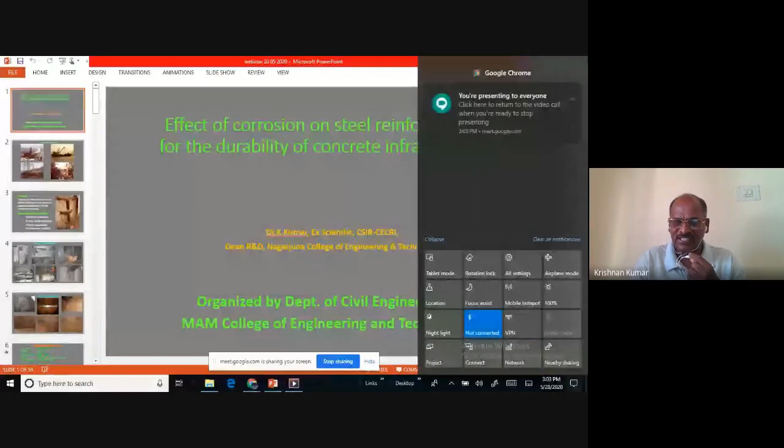Are you able to see my screen? I think you are not able to see my screen. I have to make present now. Yeah, your entire screen, and I have to make and share. Correct? Are you able to see my screen now? Yes, sir. Yes, sir. Yes, sir. Now my presentation is seen. Yes, sir. Slideshow. Oh, okay, sir. Now it's clear.

My dear participants, today we are going to discuss the effect of corrosion on steel reinforcement for the durability of concrete structures. So the subject is steel corrosion in concrete, not in the atmosphere.

I am going to discuss entirely about steel reinforcement corrosion in concrete, which is different from the atmospheric corrosion of steel. So what are the effects, and how to monitor and protect against it? All these things we'll try to cover. So within the available time, we can share our experiences.

So you are seeing now the corrosion problems categorized into 4 different areas. One is industrial corrosion - in the industrial field, corrosion is happening. Another is shipbuildings and fortresses and so on. Then transmission towers and power generation units, inclusive of nuclear power corporations. And finally, transport and infrastructure.

So corrosion is initiated when the atmosphere becomes aggressive. Automatically, in these 4 different areas, corrosion never stops - it will start. Your materials will start corroding. So corrosion is the loss of metal, and when you have loss of metal, automatically you have studied stresses and strain and so on.

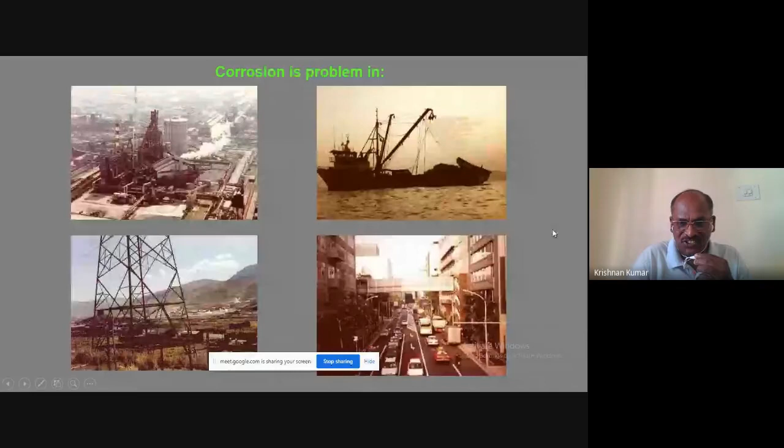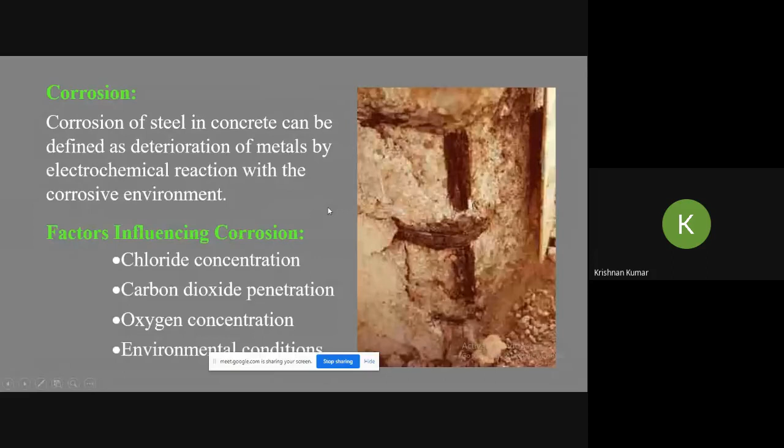...loss of material by way of electrochemical reaction. Corrosion is an electrochemical reaction. For electrochemical reactions to occur, there are different components needed. Any electrochemical cell has 4 components: one is anode, another is cathode, and the electrolyte and electrical continuity. If all 4 are satisfied, then electrochemical reaction happens. So mainly these are the 4 factors predominantly that initiate and drive corrosion.

When you are talking about that, there's chloride concentration, oxygen concentration, and other environmental conditions. Environmental condition means the temperature around the atmosphere, the humidity - everything comes under that.

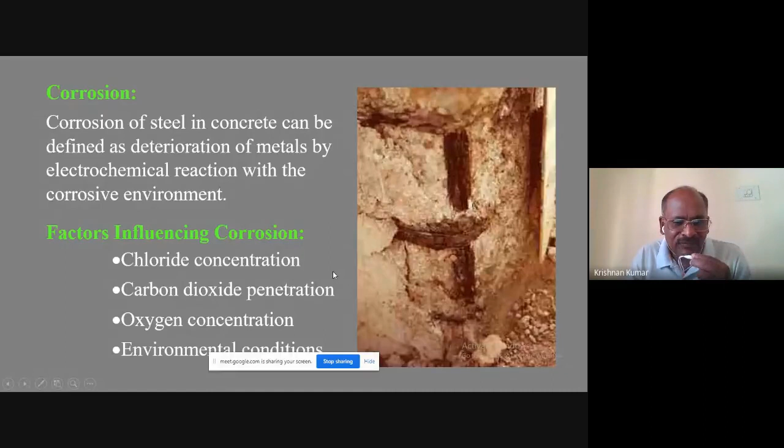So these are the phenomena that influence corrosion. When you have any industry or structure, first and foremost, you can have visual observation. Through visual observation, you can identify whether the structure is corroded or not.

Normally in beams, flexural members, or even compression members, the corrosion cracks occur parallel to the reinforcement. Other structural cracks may be perpendicular to the main reinforcement, but corrosion cracks occur parallel to the main reinforcements. So these are the different types of corrosion that happen.

This photograph we took from Trichy BHEL. We attended a consultancy there and saw that the structures were under corrosion. Now they have rectified it and are maintaining it properly.

This is another example, especially Kudankulam. You know, Kudankulam Atomic Power Station, the entire township is supplied seawater after RO treatment. During the treatment there were some problems because of which corrosion started.

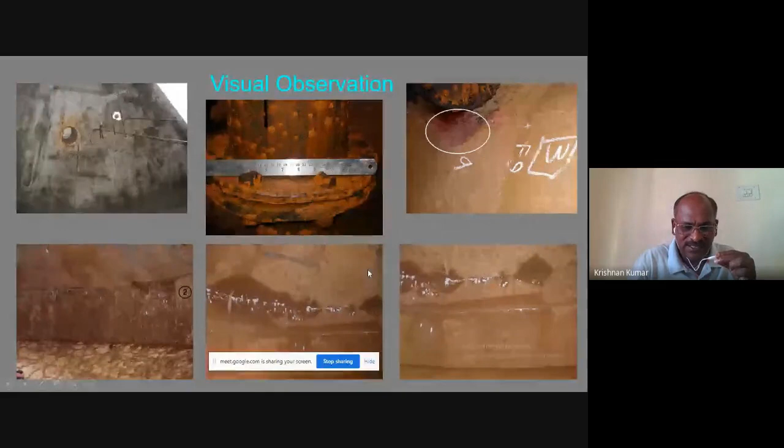This is inside the water tank. You can see the inlet, outlet pumps and all these things, and these are the walls inside the water tank. Leaching and corrosion products, everything deposited. So this is also a major problem.

It has happened, but after a successful audit we were able to give a good suggestion, and then they rectified it.

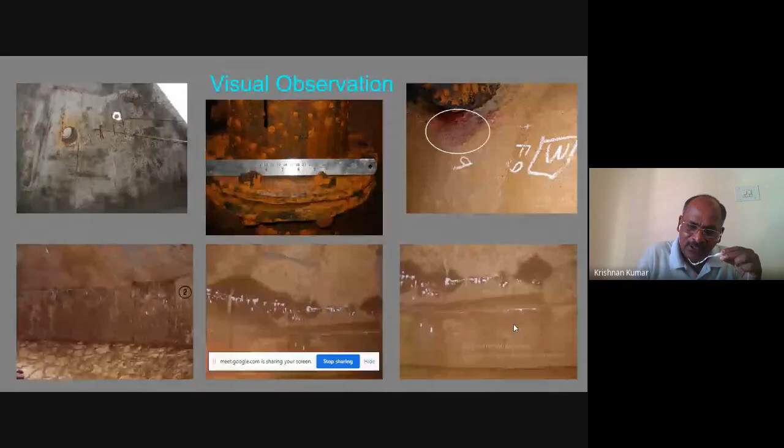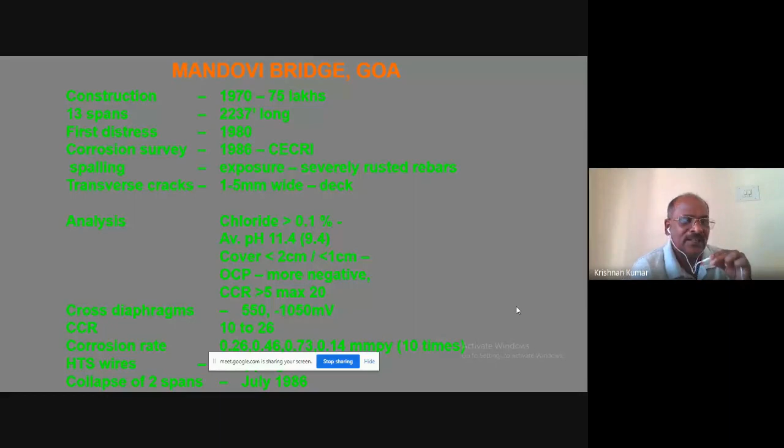So now as a civil engineer, we cannot see things from just one angle, only the construction of a structure or something else. We have to foresee whether the structure is going to have long durability, whether it will take up proper loading conditions. All these things have to be taken into consideration, for which you need quality materials, quality construction, and quality maintenance. These are the things that are very much required.

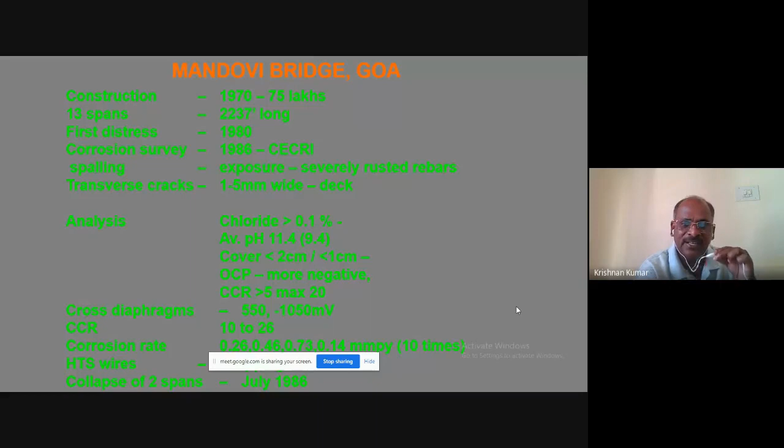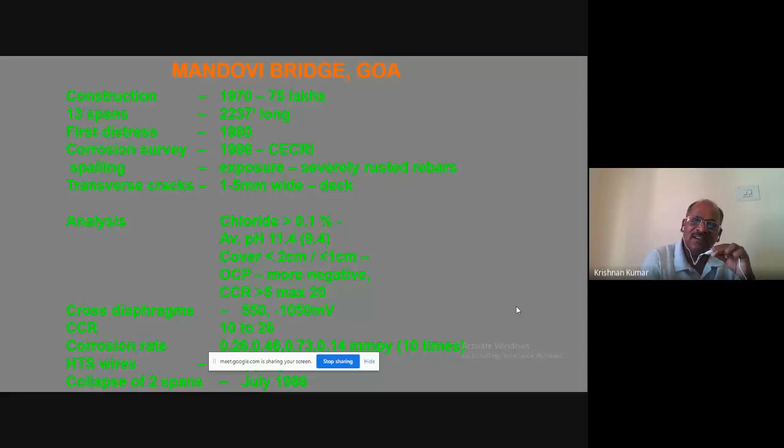For example, Mandovi Bridge, which is in Goa, Panjim. Now there are 2 bridges, but before that there was only 1 bridge, called the Old Mandovi Bridge. The construction took place between 1970 to 75. This is one of the case studies I am going to share with you. It has 13 spans, total length 2,237 feet long, and the structure is of balanced cantilever type.

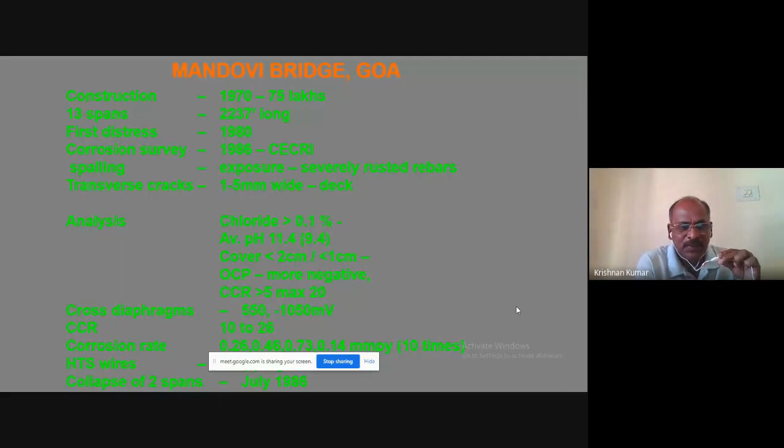The first distress was during 1980, observed by visual observation, and they approached the CECRI lab. CECRI took up the consultancy, visited the site, and made a corrosion survey. They saw numerous spalling, exposure of reinforcement, heavily rusted bars, and so on, and transverse cracks, meaning cracks parallel to the reinforcement, were noticed.

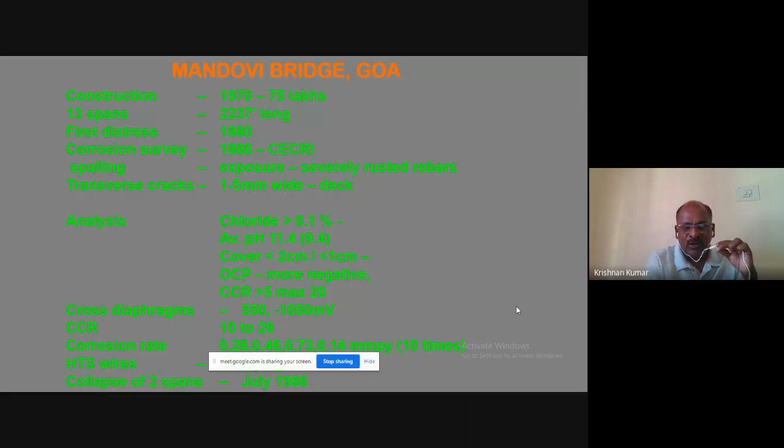Then samples were taken and laboratory analysis was done. The chloride level was found to be 0.1%. The pH value got reduced even up to 9.4. The cover thickness existing there is very less, around 2 centimeters.

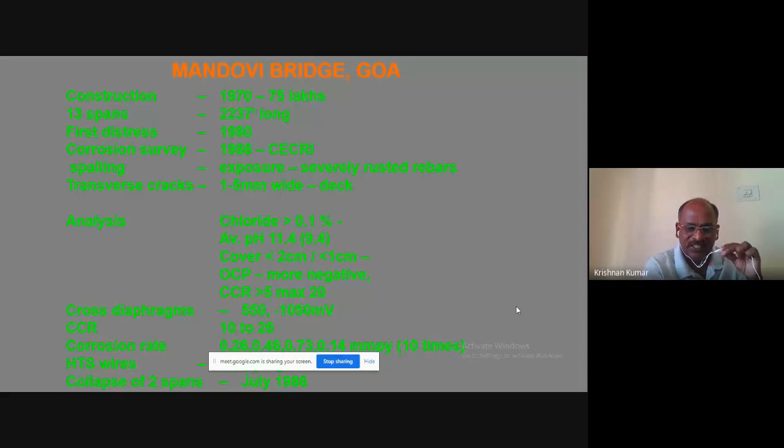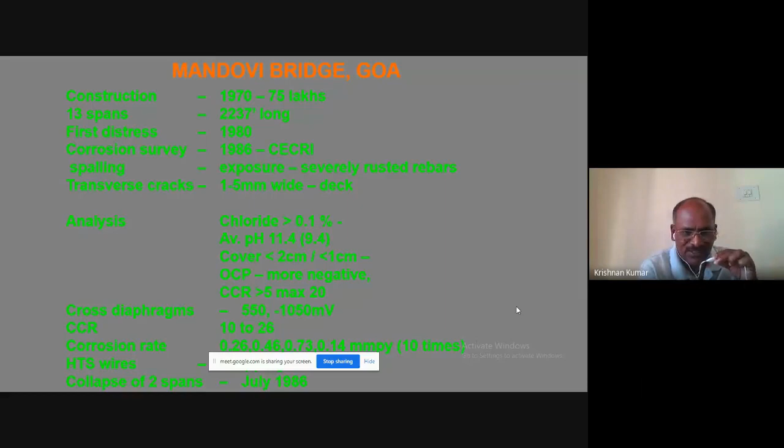And OCP, open circuit potential measurements, were made, which were more negative. This we are going to discuss in further slides. CCR value means corrosion current rate, and CCR value is calculated from OCP with the resistivity measurement. These are the open circuit potentials - it even went up to minus 1050. It's a very, very highly aggressive condition. More corrosion has happened, so only then this kind of open circuit potential may be coming.

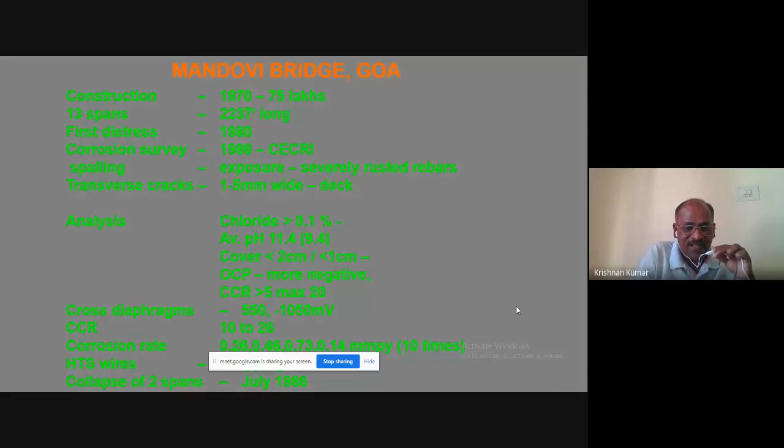And CCR value of 10 to 26 is also very high. The corrosion rate measured is 0.26 millimeter per year, which is a very high level. And the high tensile steel wires used for the pre-stressing operation were also under corrosion.

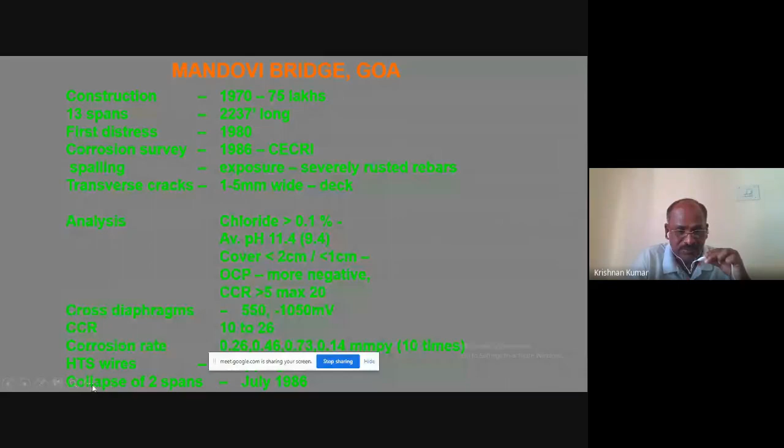Then 2 spans collapsed during 1986. So these are the things - the failure is mainly due to corrosion.

Correspondingly, that STUP consultancy has identified some failure mechanism. You can see here this entire bridge is of balanced cantilever type, and even the last span has the counteracting load given. This is segmental type construction, and you can see how it happened.

Because of the balanced cantilever type, when the load is coming, it is allowed to bend downward. So the main pre-stressing tendons were given to take up the flexure load, which is at the top. Being a segmental construction, whenever the deflection is happening, the joint is opening up.

This bridge is just above the backwater, rich in seawater, and because of the wave action there is complete mist formation. That atmospheric condition is completely like a salt spray mist formation, rich with chloride and moisture content. Whenever rain comes, that also flows over, so there is deposition of salt on the deck slab, and the rain is also flowing along with the chloride ion at the joint.

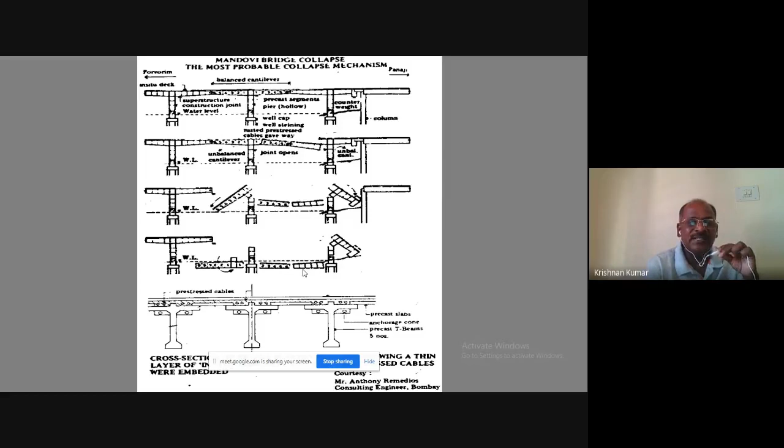So this is the simplest form. Number one, in those areas they should not have gone for balanced cantilever type, and also they should not have gone for segmental construction. So this is the learning from the failure that the design engineers got.

Then accordingly, now both the Mandovi bridges exist. Those bridges were constructed as simply supported spans with girders, without any segmental type. Now, around 1997, they commissioned it. Over the years it has not had much effect, it is working very well.

Another thing is, in this bridge they had not made any protective system against corrosion, but the new bridge which they constructed is made with corrosion protective coatings given to all the reinforcement, and a monitoring system also incorporated. So now these bridges are serving better.

So, learning from failures. Another important thing in concrete is CO2, which is one of the major things that also causes degradation of the entire structure. For example, when CO2 attacks the concrete surface, we know very well that concrete during hydration has C2S, C3S, and so on, and CaOH2 is also developing.

CaOH2 is calcium hydroxide, which is available there. A lesser amount is utilized during hydration, and the major amount remains available inherently within the concrete mass. When CO2 is exposed to the concrete structure, it reacts with the CaOH2, finally reaching CaCO3. That CaCO3 has a higher volume than CaOH2, so it expands and creates cracks. Because of these micro cracks throughout the mass of the concrete, it degrades the concrete. This is called carbonation.

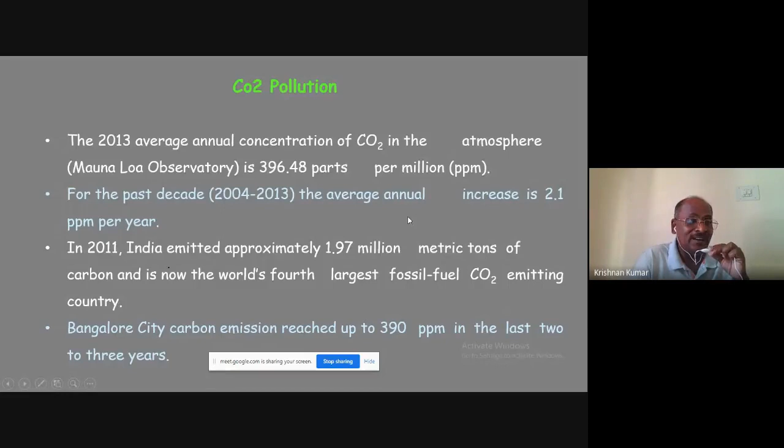India is the fourth largest CO2 polluter, due to fossil fuel emissions in the country. For example, in Bangalore alone, it was 390 ppm in the last 2 to 3 years. Now it may be more than that, but because of COVID it got reduced. I think after that it will shoot up again.

Yes? Anybody? Next is, what are the importance of corrosion? Why do we have to worry about corrosion? Corrosion causes economic losses, both direct and indirect losses.

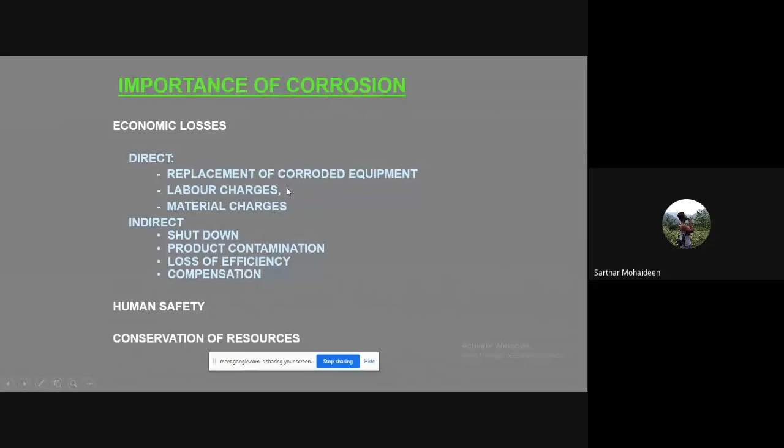When talking about direct losses, that is the replacement of corroded equipment, corroded segments, or corroded structure, and labor charges and the material that needs to be replaced. So these all come under direct losses.

When talking about indirect losses, because during replacement there may be a shutdown, there is product contamination, loss of efficiency, and compensation. Suppose if any accident happens, we have to give compensation. So these are the indirect things.

We can see that recently the Varanasi bridge collapsed, and that's also due to corrosion. So now in our country, almost all bridges need to be inspected and maintained properly—that is the concern in the ministries. Next is human safety: if corrosion failure is catastrophic, the safety of humans is questionable, and conservation of resources also gets reduced. These are the main concerns when you have corrosion in infrastructure.

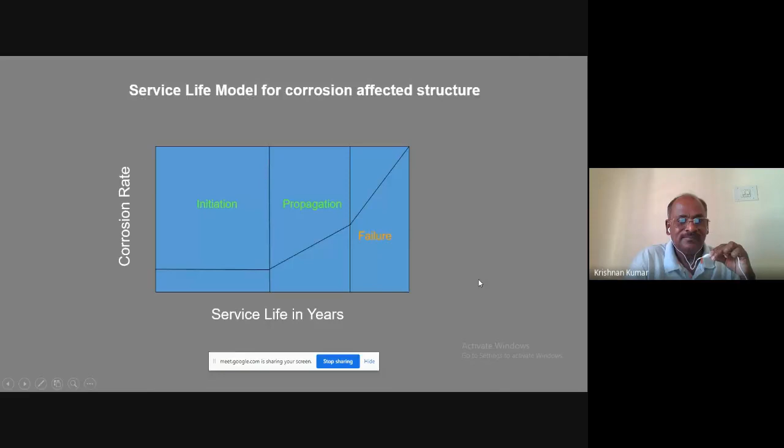For example, in the perfect passive region, all our reinforcement lies. How is it in the perfect passive region? It depends on the tendency of steel reinforcement. The steel reinforcement we use in concrete is called mild steel or carbon steel. If more carbon is added, that is high carbon steel, used for pre-stressing steel. Generally it is called mild steel, which contains carbon and ferrous. So now what happens? The ferrous acts as an anode, and the carbon acts as a cathode.

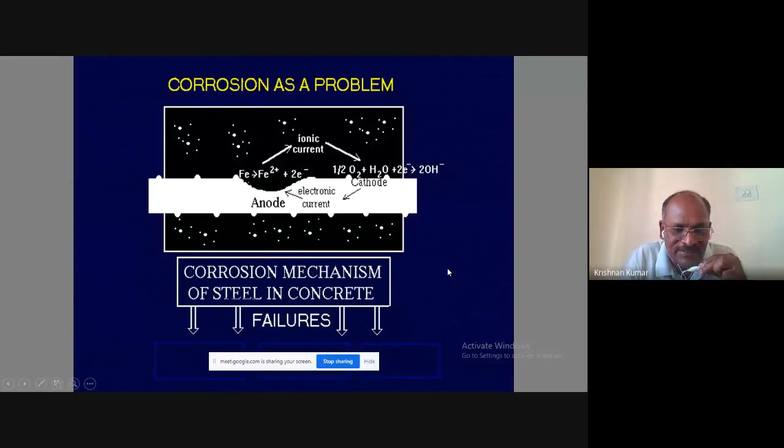The ferrous releases Fe2+ ions, and the electron goes there. Whatever water and oxygen are available react and give back OH- ions. The Fe2+ and OH- ions together form Fe(OH)2. That is the corrosion initiation. So the corrosion takes place as an electrochemical reaction.

So this forms FeCl2. The electron is not static, so it has to move - it has to close the circuit. Initially chloride forms ferrous chloride, then the electron goes to the cathode side and reacts with water, giving OH- ions. Finally the end product becomes Fe(OH)2, ferrous hydroxide, plus 2H+ (sometimes H2), and 2 Cl-. The end point gives 2 HCl.

Hydrochloric acid - when this is near the reinforcement, it further aggravates the process. Oxygen also contributes the same way in higher amounts, so finally there may be 12 times HCl formation. This is the cathode reaction, where the 2 electrons are consumed.

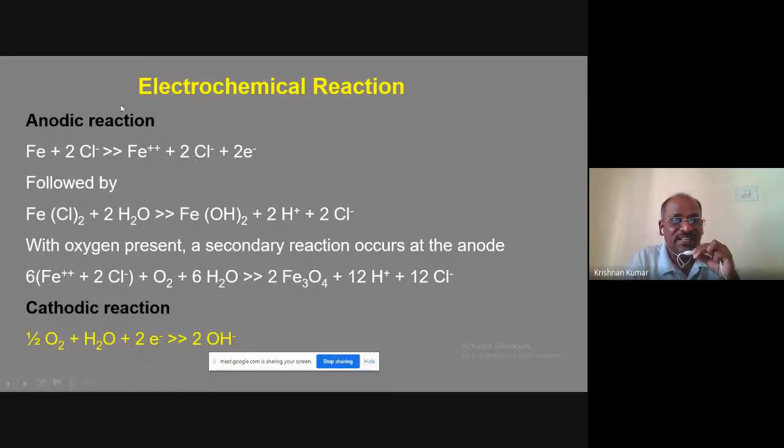So what we observe is that chloride is the major factor which not only initiates but also propagates corrosion. We have to avoid chloride reaching the steel surface to protect our structure. That is the conclusion from the electrochemical reaction.

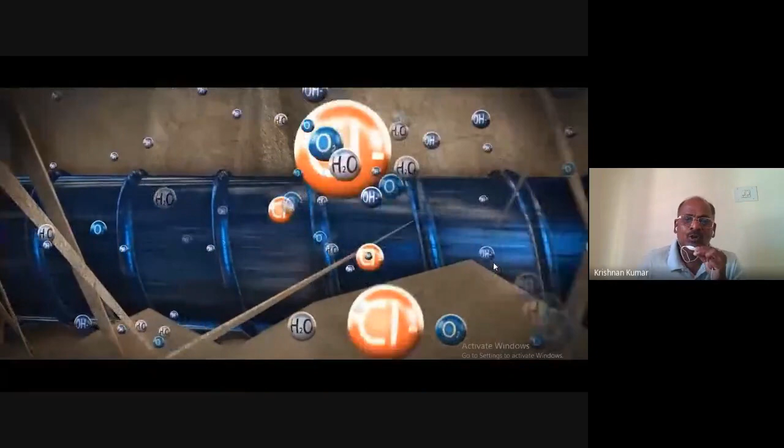When chloride comes in, its tendency is to move nearer and attach to the steel reinforcement because of Fe++. Then with water and other factors, it starts corroding. A good passivated reinforcement starts corroding, and it propagates, reducing the cross section. You can see the cross section reduction happening.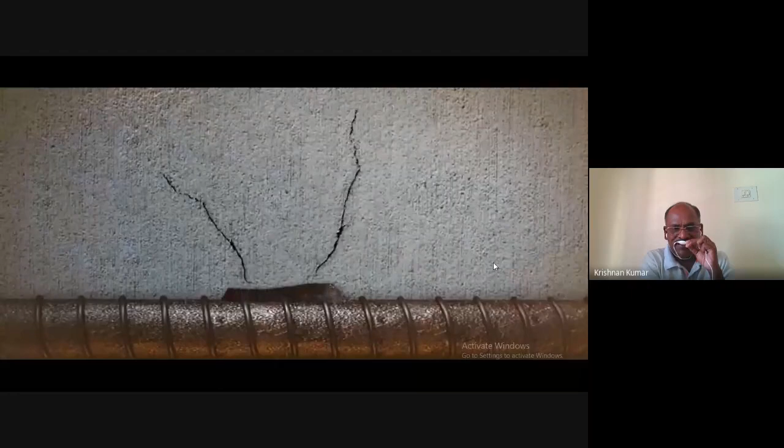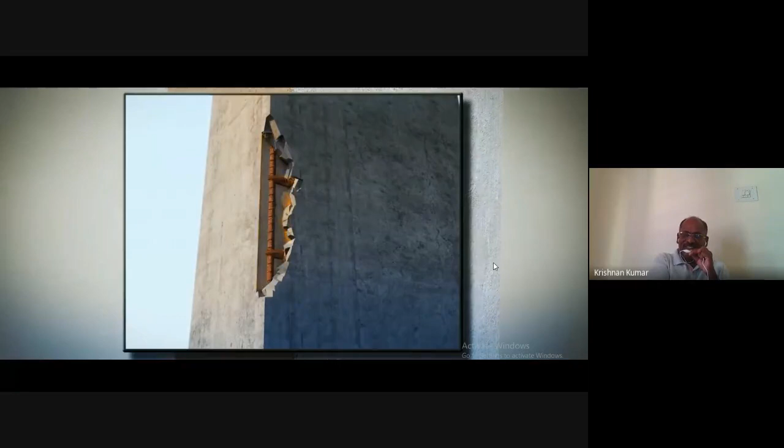The corrosion product is higher in volume than the metal loss, so it exerts pressure and the concrete gets cracking. You are seeing the cracking. That is the way cracking occurs - wherever the least resistant part is available, cracking happens there. Then the steel reinforcement is exposed, leading to further corrosion, and finally the structure fails. These are the general phenomena.

In our laboratory, we have done some studies on the effect of chloride in steel reinforcement. This is called polarization measurement. For the steel reinforcement, we used a 3-electrode system in the laboratory cell, and we made the polarization from cathodic to anodic.

You are seeing different chloride levels here. The orange color is the control, and the rest are different chloride contents. With lesser chloride content, 1000 ppm added, the potential shifts less negative, in the positive direction, meaning only contamination happened, no corrosion. But adding 20,000 ppm, the green color shows less shift compared to 1000 ppm. Further at 25,000, 30,000 and 35,000 ppm, the potential increases in the negative direction, meaning spontaneous corrosion is happening, and the corrosion is very aggressive when chloride ion concentration is higher.

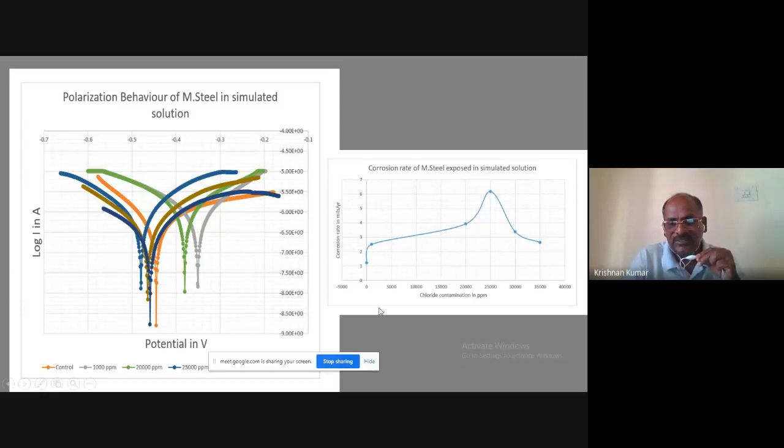Another question may arise: why 35,000 ppm? That is the maximum chloride available in seawater, based on some journal references. So 35,000 ppm is the maximum limit, and beyond that level there is no further contamination of chloride. That is why we took maximum 35,000 ppm.

Another important thing is open circuit potential. Before making the polarization, we took open circuit potential with respect to different contamination levels. Initially, the open circuit potential is minus 0.6 volts, and after 1000 ppm it went to minus 0.2. What is the reason? Because chloride is a very good conductor, due to the conductivity it went to higher potential, meaning less negative. Further adding chloride, it continues in this direction.

After that it is decreasing. Why is this decreasing? Because at 25,000 ppm of chloride, corrosion already started. Due to the corrosion, the corrosion product formation creates further resistance, reducing the conductivity, and correspondingly the open circuit potential increases in the negative direction. So this is the understanding on this project.

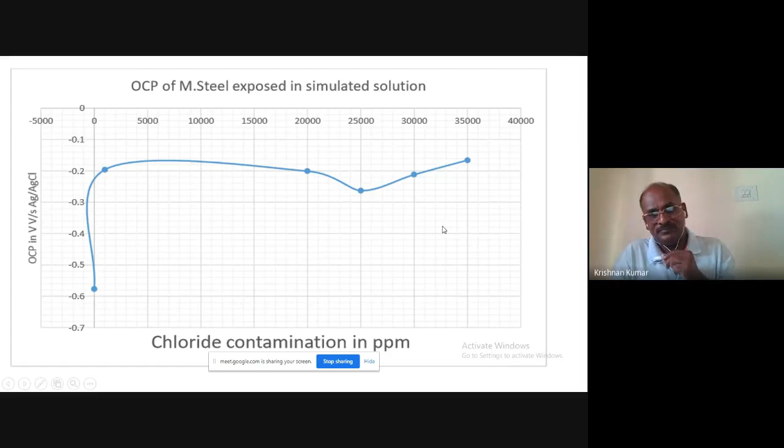This is the model, the general model of how corrosion happens in steel reinforcement. The penetration of chloride ion creates corrosion product, forming small cracks. Further accumulation increases the cracks, and if the cracks are more, the concrete gets loosened and falls out. During the cracking and after the cover concrete falls, only then do we understand our structure is under corrosion. So we have to take necessary steps to overcome this. These are the things shown in a small model, which normally happens.

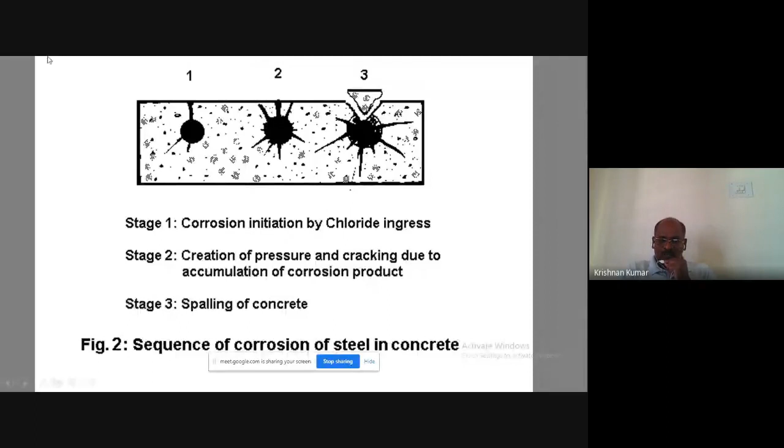Now, since corrosion has happened, we must understand the extent of the corrosion and where it is occurring. We don't know where within the cover concrete and plaster the corrosion is taking place, so we have to use some non-destructive testing method. Universally, people use open circuit potential measurements using a reference electrode.

This is another way, called half cell measurement. In this case, we use a saturated calomel electrode surrounded with KCl-rich solution, and one half cell is prepared like this. It is connected to the negative terminal of a high impedance multimeter, and the other end of the multimeter, the positive node, is connected to the steel reinforcement. The reference electrode is moved in a properly mapped grid formation, and we measure the values in terms of voltages, either negative volts or positive volts.

After the measurements, we have to go for result interpretation. There are many people available, equipment is well available, and people are doing the site measurements. But result interpretation is very important. If you do not properly interpret your results, you cannot overcome the corrosion problem. So let us see how to make result interpretation.

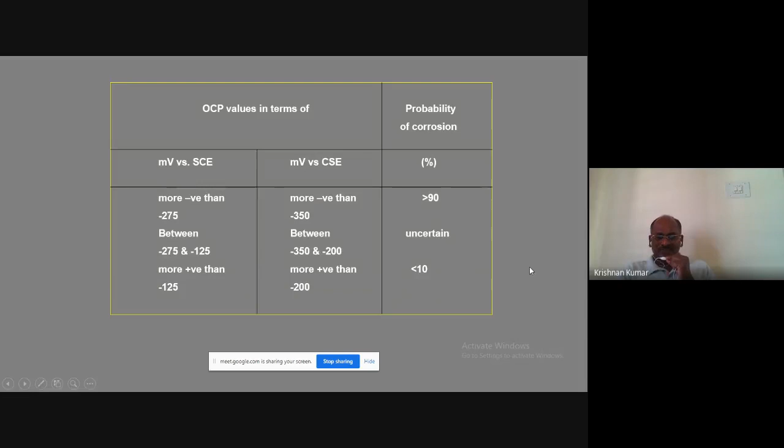This is the software we developed for interpretation of the results, based on LabVIEW. Here you can see that whatever readings we have taken at the grid points, we feed into the ASCII file and give to the software. Within a moment we are able to get this kind of mapping. In this mapping there is a table: more negative means it is corroding, more positive means it is not corroding.

Here you can see directly where the maximum negative points are. The blue color shows the maximum negative points, so these are the areas corroding much, and there we can take our treatments. Wherever the hot spots are, we can take treatment there. So the OCP mapping is very useful for result interpretation.

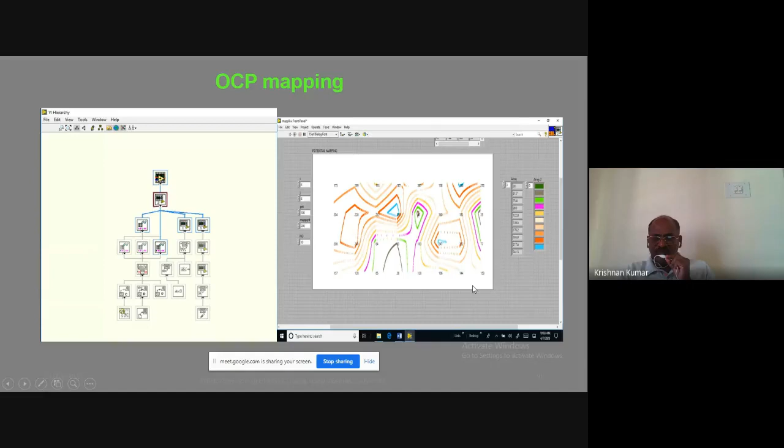Another important thing is called surface potential measurement. The earlier one was open circuit potential measurement; now this is surface potential measurement. Earlier we needed only one electrode, but connection to the steel reinforcement was required, and that is more accurate than this measurement. This will only give an idea of the surface contamination - how much chloride, and where it is contaminated - but it will not give an idea about the quantitative aspect of the corrosion process.

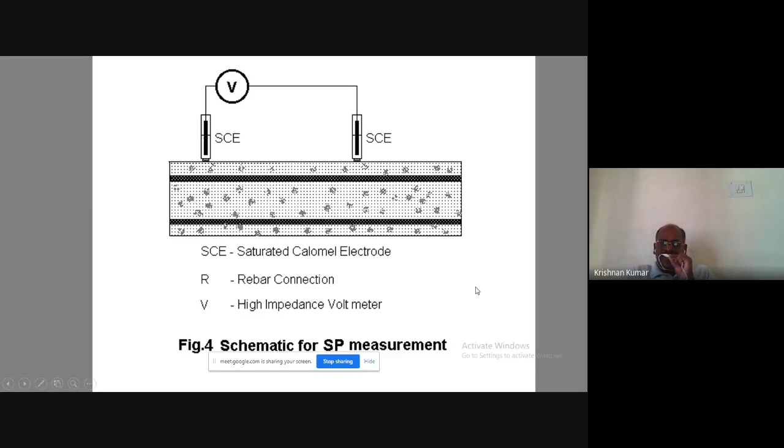Here, one electrode has to be kept stationary and another electrode has to move on the grid lines, and those readings again have to be mapped. The gray area will tell you about the maximum contamination of chloride. So the maximum potential zone is the maximum contaminated chloride area. That's the way we can do this.

These are examples of the electrodes. For a new structure going to be constructed, we can place these kinds of electrodes very cheaply inside it, and periodically check the corrosion rate and other things. This comes under a three-electrode system, which can be connected to the polarization measuring equipment that will give you the corrosion rate directly.

Here also is another one - this is the potential measurement electrode, a solid electrode. This also can be embedded during construction, and it will give you the potential ranges. If you make these kinds of grids, you can enable an online corrosion monitoring system also. So this is the one reference electrode.

Earlier I showed in my slides that we have used this saturated calomel electrode in the solutions. So we have different problems. What are the main problems we face? Suppose you are at the soffit of any structure and want to take a measurement, what happens? The water, everything will spill. You will not get the conductivity and you will not get the open circuit potential.

Then what to do? We have to go for a solid electrolyte type reference electrode. My team has done this, and we have patented it also. Now we are waiting for the grant of the patent, it is on the evaluation stage. This need not have any problem. At any location, you can keep the electrode and find the open circuit potential. That is the advantage of this new reference electrode.

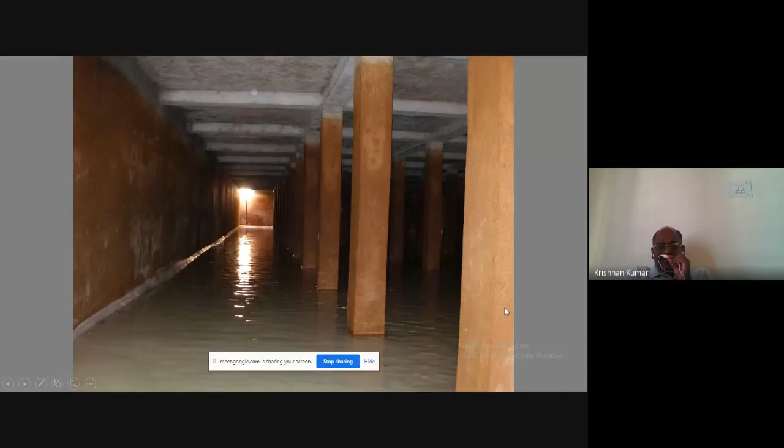This is one of the photographs. I said in the Kudankulam Atomic Power Station, they are using seawater as drinking water after treatment by RO. This is the ground level storage tank. Immediately after treatment, the water is coming here for storage. And you are seeing all the corrosion stains all over the tank.

They referred us and we went there and found the causes for the corrosion, and that was eliminated and new treatment was done. Even now it is working good. It's around 2004 we have done this job. Even now it is working very well in that particular treatment plant.

This is phenolphthalein indicator, used to measure carbonation. If any CO2 attack is there, then we have to make a carbonation measurement. Here we have to spray on the surface and wet it with the phenolphthalein indicator. If it turns pink, then there is no carbonation. If it does not turn pink, carbonation is happening.

But here the situation is different. We took a cross section also and did the same thing, but inside it got a pink color, only the surface did not turn pink. I think corrosion deposits were there, and because of that the alkalinity is not there. That is why it did not turn pink.

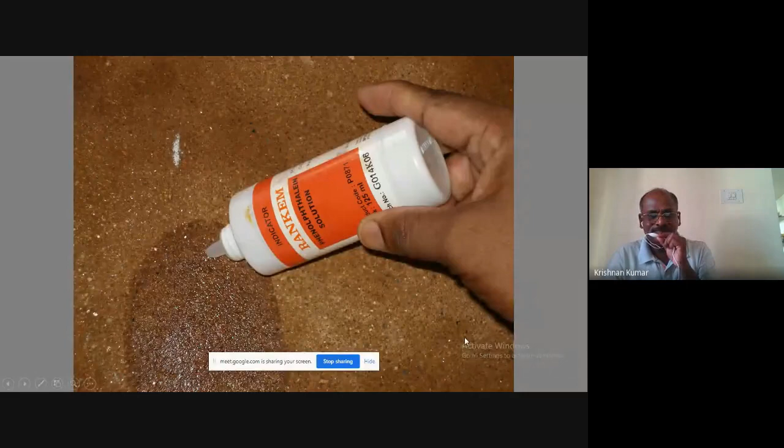So this we have tested here in Bangalore. These are the exposed rebars, and we wanted to see whether carbonation was a problem or not. In some locations carbonation happened, but in most locations carbonation is not a problem, there the corrosion is the major problem.

And in Bangalore, do you think this much heavy corrosion is happening? Yeah, any instruction, please? Shall I continue? Yes sir. You can proceed, sir. Okay.

Normally this looks like corrosion that happened in a seashore area, but this is exactly in Bangalore. So how did this much corrosion happen? This is also one very important, interesting story.

After making our condition monitoring assessment, we found that above this structure there is a water fountain and a planter box, but they have not done proper waterproofing treatment for that. So whatever water is available above is penetrating inside. Another important thing is, those days they used filtered sand. Filtered sand has a tendency to retain water very nicely, and that is aiding the corrosion process because of the water flow within the concrete mass, which gives rich oxygen and H2O, all these things increase the corrosion.

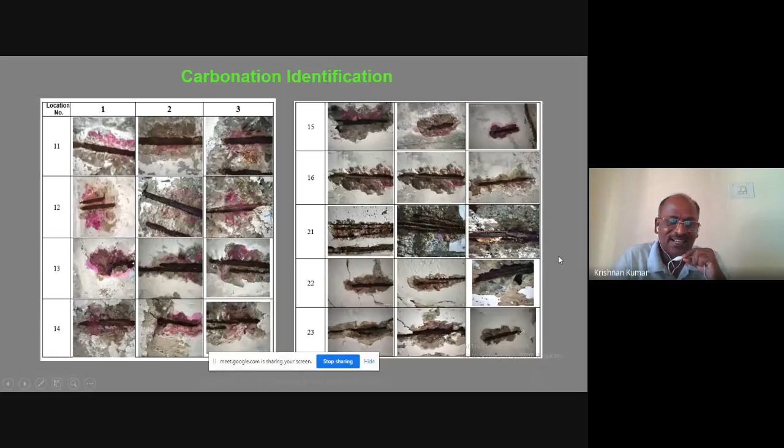This is one of the corrosion measuring systems, called the guard ring technique, the 3 electrode principle. This equipment is imported, it's around nearly 30 lakhs rupees we spent in the CSIR. Through this we have measured the corrosion rate inside, all these things we measured, and correspondingly we compared the made analysis.

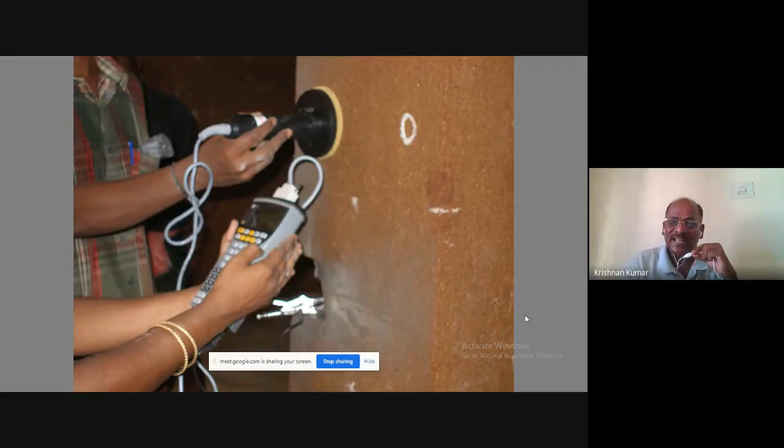So this is indigenously our CSIR SERC has developed the corrosion rate measurement equipment. Whatever we have seen in the previous one, the same job this is doing, but the cost of the equipment is very less. This was used at one of the paper industries in Kerala, Kottayam Hindustan Newsprint Limited, where we attended a corrosion problem with my ex-colleague, assessed it, and gave remedial measures.

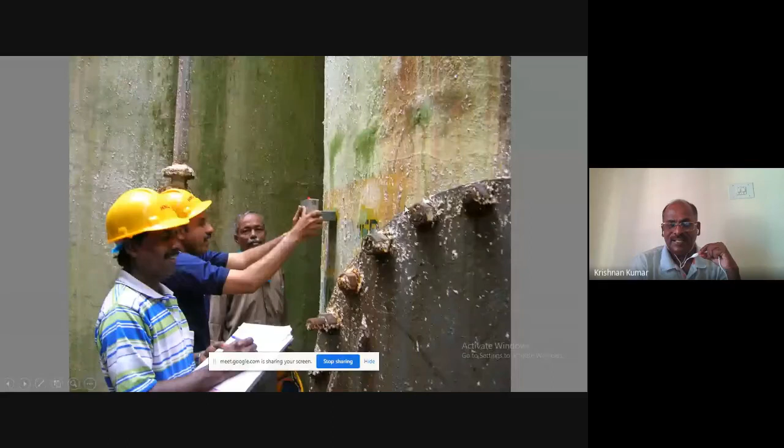You see, this is the resistivity meter. Based on resistivity also, we get a corrosion rate. Suppose chloride has penetrated inside, that gives more conductivity, so resistivity will be less. If chloride has not penetrated, resistivity will be higher. Based on this, we can analyze whether the structure is contaminated with chloride or not. So this is another kind of NDT.

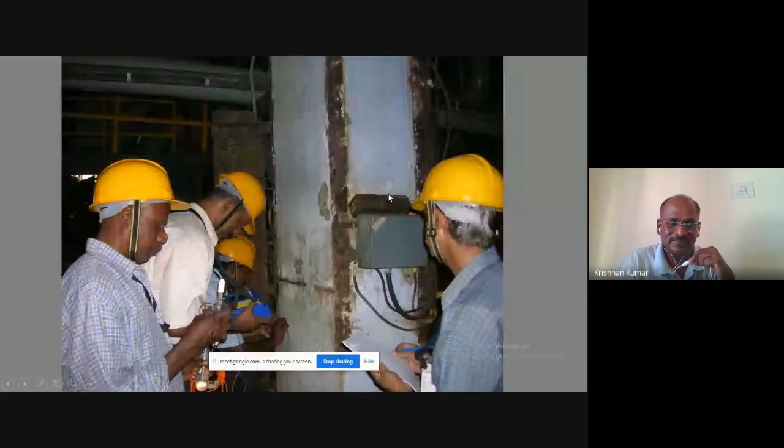These people have already retired. Now this is the cover thickness measurement that our colleagues are doing. This is the surface potential, SP values. I said two electrodes are there because we are not able to get any connection from the inside steel reinforcement, so a grid is formed. We found one is fixed and one is movable, and we took the surface potential measurements.

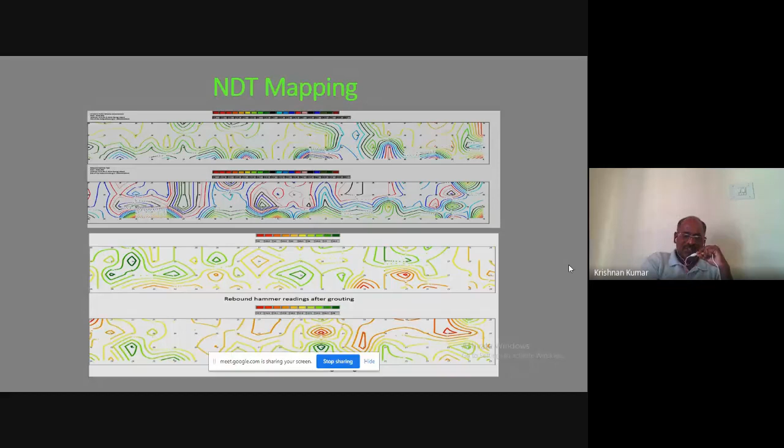So this mapping, as I already told you, we have made some mapping. The mapping can be used for any kind of such grid measurements. Surface potential measurements we can make, and for example resistivity also we can give here and make a mapping. You can make any kind of mapping - OCP you can also make a mapping.

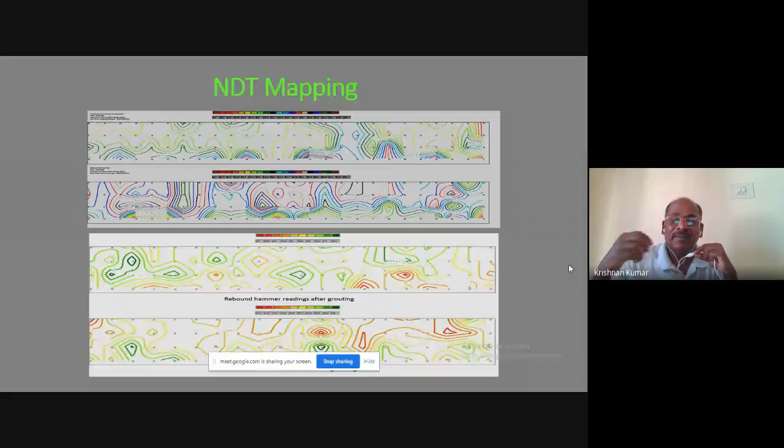Here, this is one consultancy near Bangalore, for a housing construction. During the concreting, after removing the shutters, they could see some honeycombing - the concrete was not made properly. But the contractor immediately closed all the exposed rebar with mortar. When the client came, from outside the beam seemed good, but on hammering it showed some hollowness inside. They wanted to know how much hollowness is inside, what treatment to do, whether to dismantle or rectify. These are the questions they raised to us.

We made just one day of measurement, and you can see two types of measurements we made - one is rebound hammer measurement, another is ultrasonic pulse velocity measurement. Both show that the bottom area, wherever there is greenish color and bluish color here, indicates those areas that are under the honeycomb.

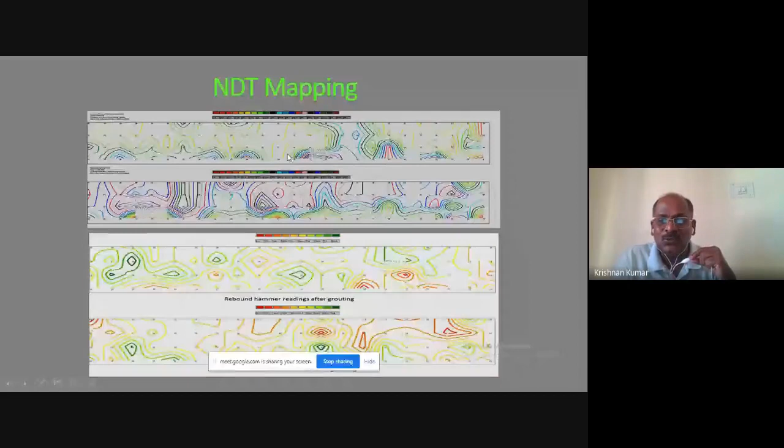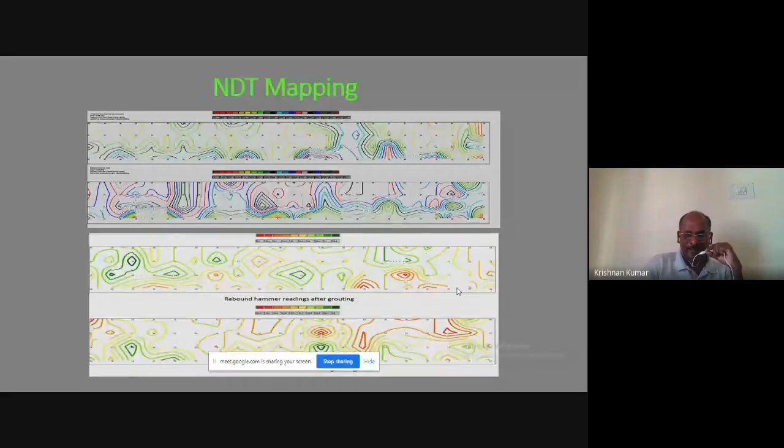So we gave these locations, made according to their scale, and suggested that at those locations they make a cement grouting. They did a proper grouting for that entire area, and you can see that in the bottom, the entire area has been rectified. All these things are now modified - the rebound hammer test also shows it is very sound. So this is the way non-destructive testing can be used and utilized for any kind of structure rectification.

Now the question comes: okay, my structure is corroding, or I want a new structure - how to protect it? For an existing structure, you have to go for electrochemical method of protection. For a new structure, you can go for painting, you can go for admixtures - like that you can protect your structures.

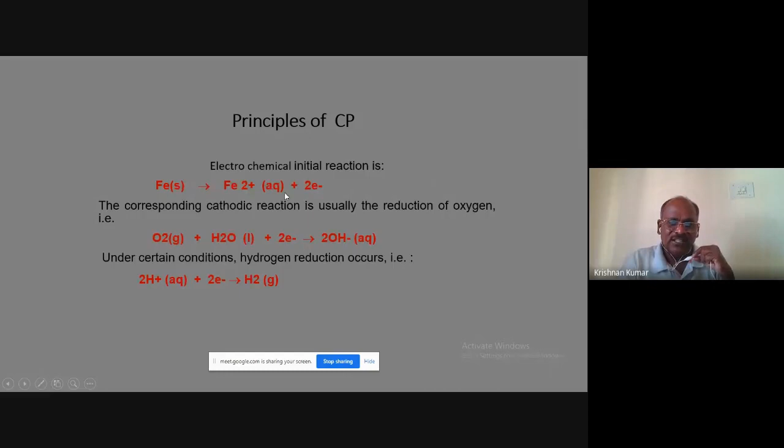This is the same thing I have already discussed. The ferrous splits into ferrous ion and electron. Instead of the 2e minus coming out, if you give back 2e minus, that ceases the electron from coming out. The ferrous will not come out because one more 2e minus is coming, and that will not allow the ferrous ion dissolution to take place. Instead, in those areas, oxide formation happens, further strengthening the passive film. So that is the electrochemical way of protection.

Now you can see we have done some experiments on it. We purposely added some chloride, and we measured open circuit potential at different chloride levels. In the specimen itself, we took a sample in the concrete and tested how much quantity of chloride is there in the control as well as the protected one. In the control, what is happening - we saw 300 ppm chloride level.

After giving protection for all three specimens, the chloride level is considerably reduced. This duration is just 24 hours. Within 24 hours, we are able to reduce the chloride level this much. This means if you apply the same thing to your existing structure, we can remove all the chloride.

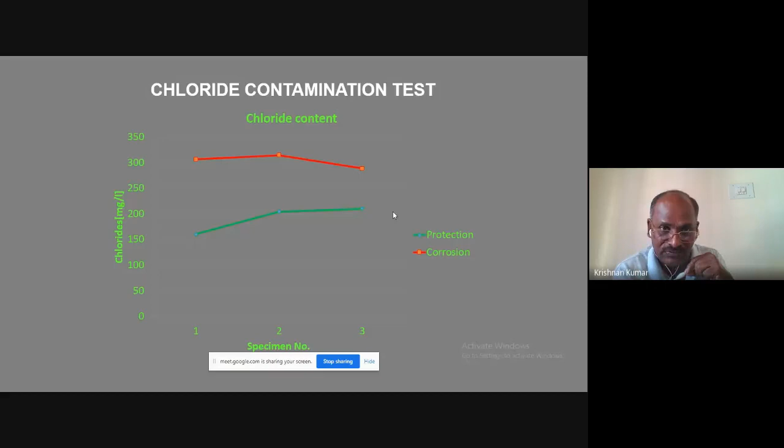So automatically, near the steel reinforcement, whatever chloride is there migrates to the surface level and dissolves into the lime solution. Then finally that lime solution can be removed. After the electrochemical removal process, you can dry the surface and do complete surface painting for further protection of your structure.

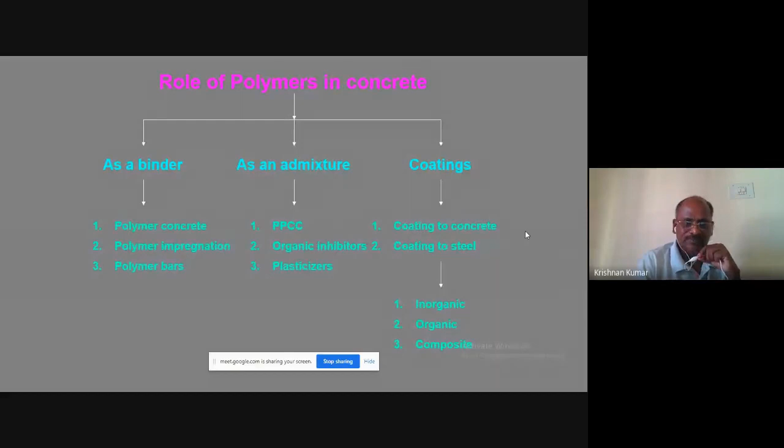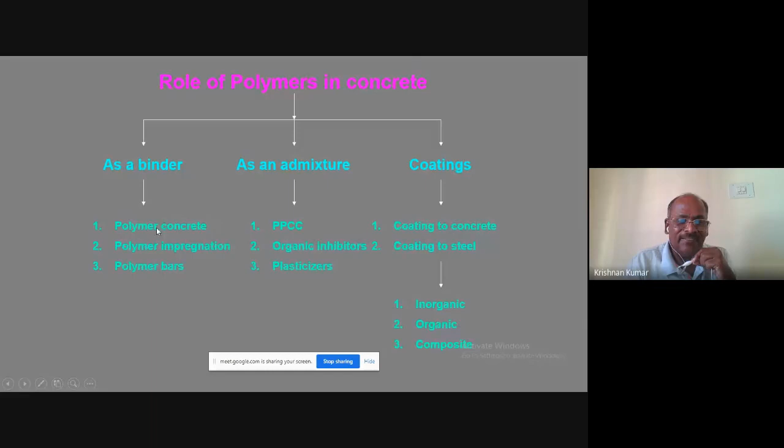The polymers also play a great role in concrete for protecting against corrosion. How are polymers used? For new structures, you can use a polymer as a binder. So we can have polymer concrete, polymer impregnation, and polymer bars or non-metallic bars - three kinds of things you can have.

As an admixture, you can have polymer Portland cement concrete - you add some polymers to normal concrete, and it forms polymer Portland cement concrete. You can also add organic and inorganic inhibitors, and plasticizers. Polymers play a great role as a plasticizer in concrete mixing.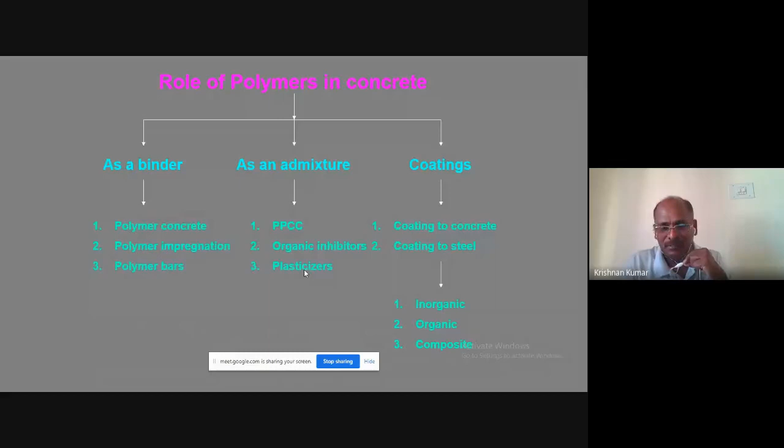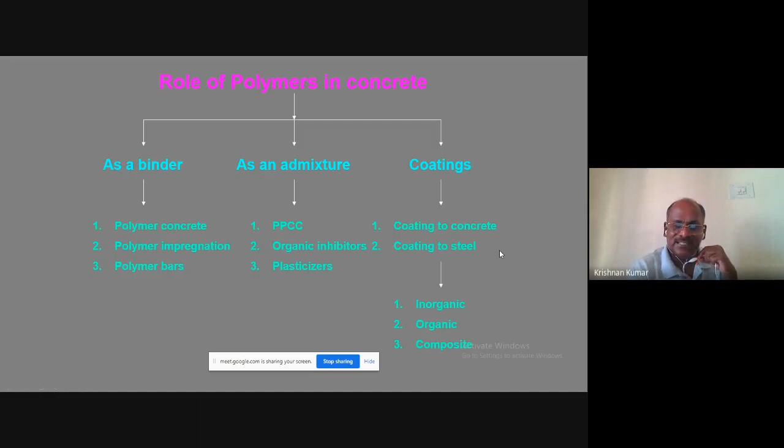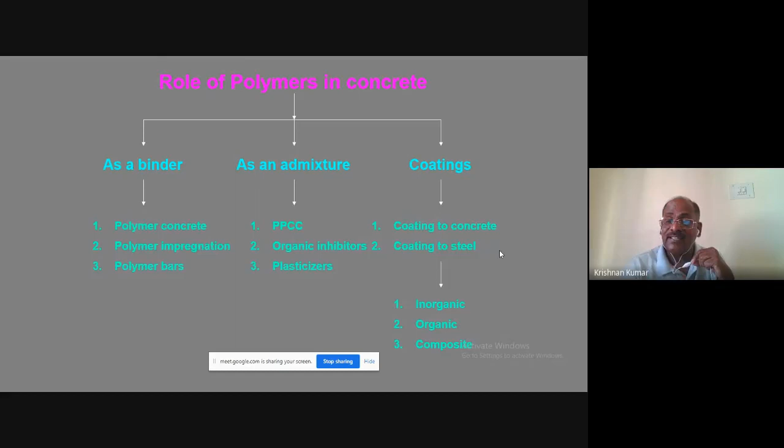All of those are polymers. Now the next thing is coating - coating to concrete and coating to steel, two varieties. Coating to concrete, every 3 years depending on the type of coating, you have to recoat again and again to maintain your structure well. Coating to steel is for new construction - the steel reinforcement has to be given a coating system that will not allow chloride ions to penetrate near the surface of the steel reinforcement.

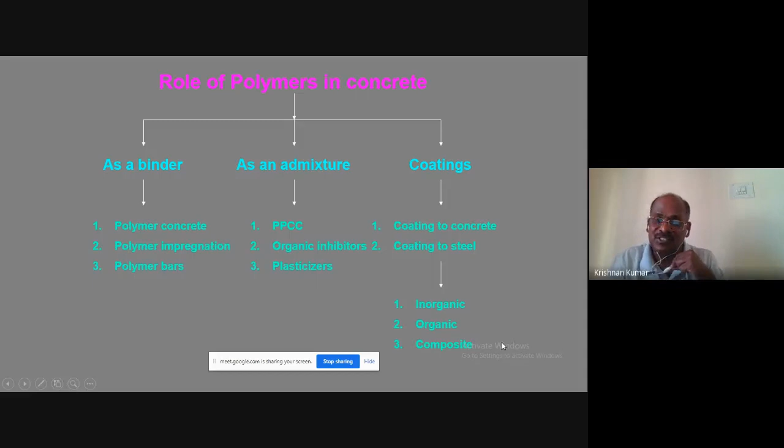When talking about coating to steel, we have three types: one is inorganic, another is organic, another is composite system. These are the three systems already available in India, so we can discuss them now - comparison of coating systems in steel reinforcement. When talking about steel reinforcement, we have these kinds of coating systems available in India and elsewhere.

One is galvanized reinforcement, people are using it especially in UK - many constructions have used galvanized reinforcements. The problem is without galvanizing, the bare rod will undergo corrosion, the corrosion product deposits over there, and cracking happens. With galvanized rebars, the sacrificial protection - the galvanized zinc gives sacrificial protection and the steel is safe. In that case, the galvanized oxide product forming will also create a crack.

Where can this kind of thing be used? Suppose concrete is in an immersed condition, then the sacrificial system, this kind of galvanized reinforcement, you can give. Even if galvanized oxides are forming, they will be dissoluted like leaching and come out, so the cracking will not happen. So that can be recommended there.

Then the next one is fusion bonded epoxy coating, a pure organic thing that gives a good look and very polished surface. What is the problem in fusion bonded epoxy? Number one, during handling it takes some damage during bending, and when pouring concrete from at least 3 meters above, it impacts the coated surface.

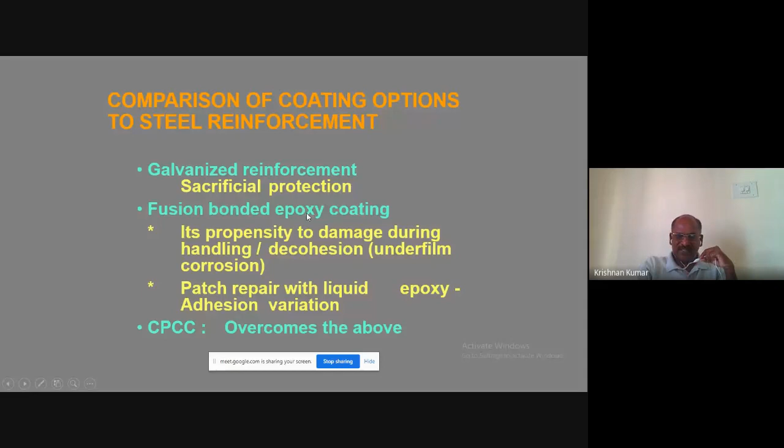So for patch repairing, earlier they have used only fusion bonded powders. Then during the repair, people are using epoxy, and that creates an adhesion problem, a bigger adhesion problem. Because of this, the bond between the coated rod and the concrete is questionable. It has only 0.85 times, but in some other coatings, it has 1.2 times. How it is coming, we'll see.

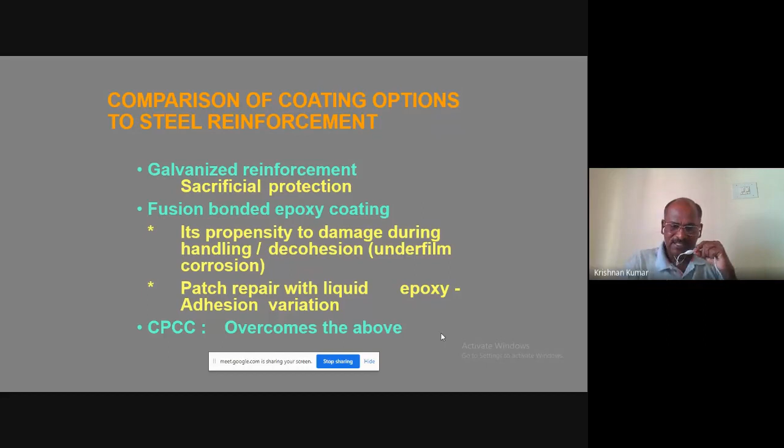That is called CPCC, Cement Polymer Composite Coating System, which overcomes the above problems. This is available now. We invented this during '93, and after that in '97 this product was launched, and from '97 it is used in the country, especially for railways and all the bridges. It became mandatory. People are now using this CPCC system. Even in Bangalore Metro rail, this particular system is used. So for this we have got our own patent, and it is granted to us.

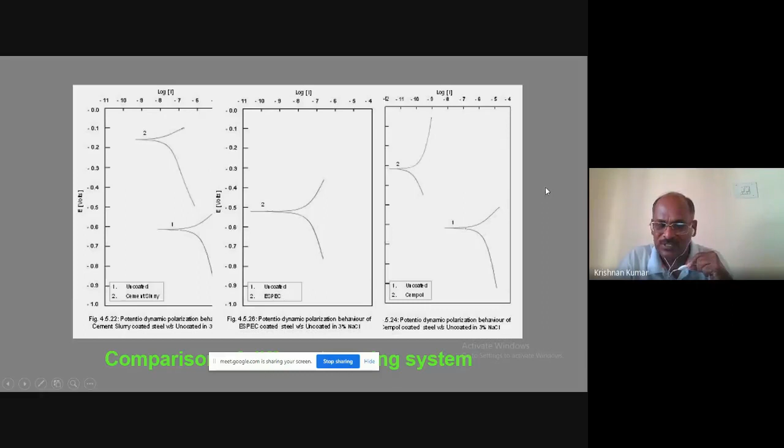And the second thing, uncoated is here, number one, and the fusion bonded epoxy is coated - that also subjected, not much difference. It is slightly above because of the coating resistance, but not much difference. Here, simply, this is the CPCC coating system - this is control. You can see it has passive protection as well as barrier protection. Both protections this has - that is the advantage required for steel reinforcement. This is the mechanism used for developing the CPCC coating system.

So what is the CPCC coating system? It has a two-coat system, primer and sealing coat. These are the things - we can apply by spray, we can apply by brush, or we can dip it like that. But this is fast curing type. So you can apply the primer on the prepared surface of the steel reinforcement, and after that you can apply a sealing coat.

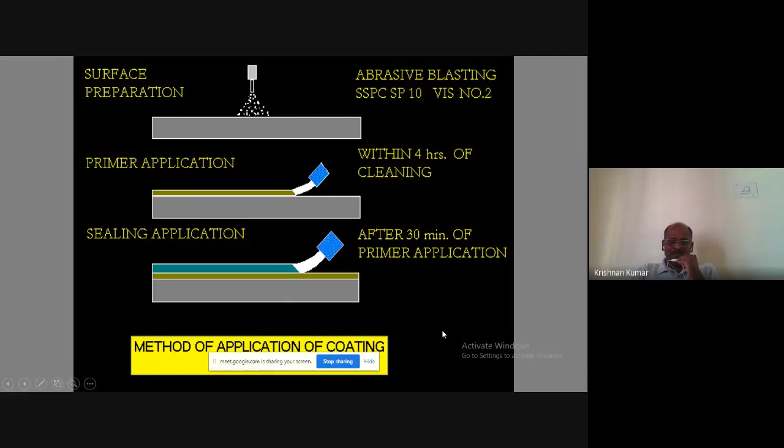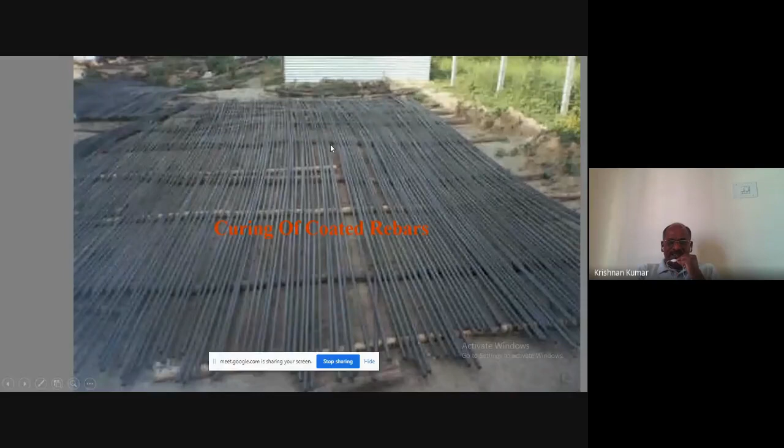So this is the prepared surface of the steel reinforcement - this photograph shows it. Now this is the coated rod, kept for curing just in the atmosphere. Suppose if rain is coming, no problem - that is the advantage of this coating system. So it is kept for 6 hours after coating, then it is stacked in the yard. The next day, this can be used for any construction purpose.

You see these are the completed stacked coated rods. We simply have to make stacking like this because abrasion should not happen on the coated reinforcement. So we have to have a wooden plank like this, and over which we stack the coated rod. This rod can be bent and utilized for construction. You see this rod can be bent to any shape, but it has its own flexibility - it will not have any crack on these edges. Even if damage happens, since this is also liquid, both have the same property.

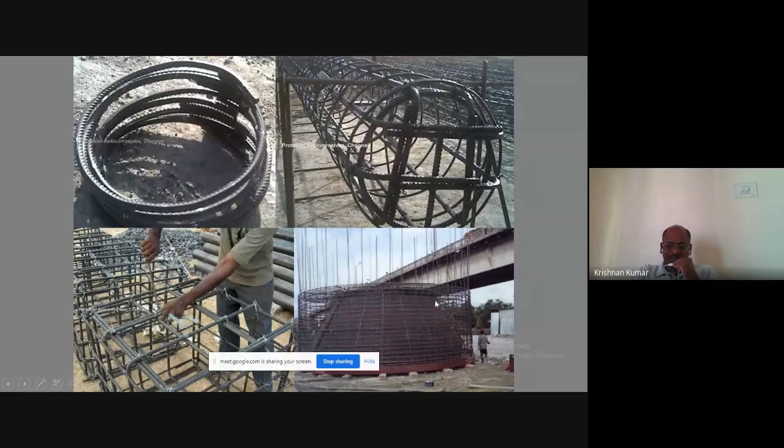This is actually construction of railway bridges. You see one girder being cast, all the reinforcement coated with that CPCC system. Now this is also one railway bridge - they are casting with that. So further casting is going on. See the concreting work people are using, because this system is a composite system - it has polymer as well as cementitious components. So in this case, it will have very high abrasion resistance. As a conventional way, people can make concreting, and it will not have any detrimental effect. This is actually flyover construction at Mumbai.

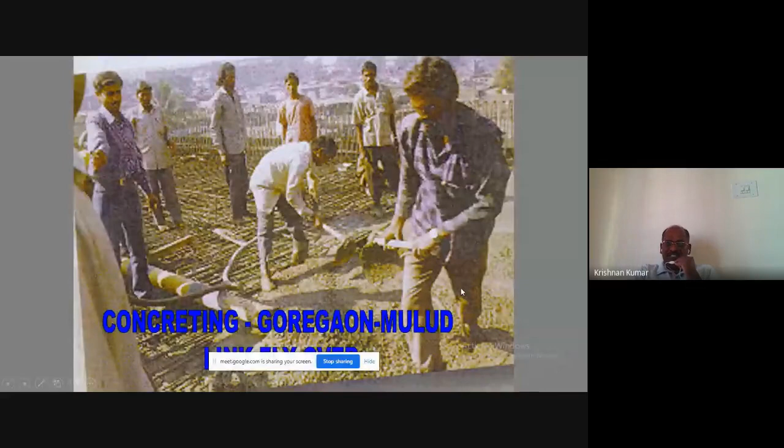These are the ASTM A775, 775M-94 quality control standard specifications. The test methods and all the passed results are available here. If anybody wants to develop their own coating system, it has to pass this ASTM standard specification.

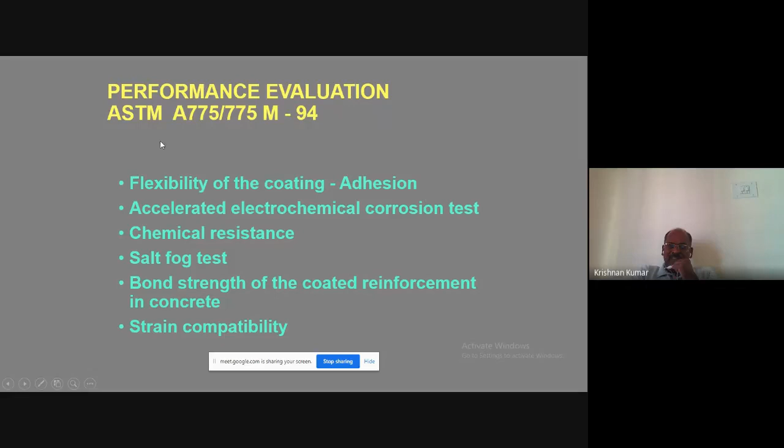When we talk about the bond, different bond systems have been made. We have to have a free end slip, so this is slipped, then we have calculated the bond between the coated rod and the concrete.

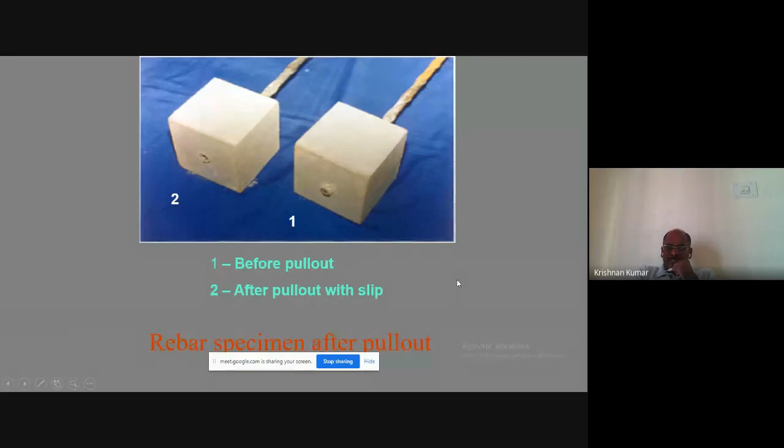Other barrier systems have also been selected, but CPCC proved higher bond strength than the control specimen. You see how the bond mechanism is happening here.

Now this is the steel reinforcement. We have developed a primer with an inherent property of metallic ionic bonding to the steel surface, creating a pi bond effect.

This is different from other barrier type coating systems. The end group is NH2 and it readily adsorbs onto the steel surface.

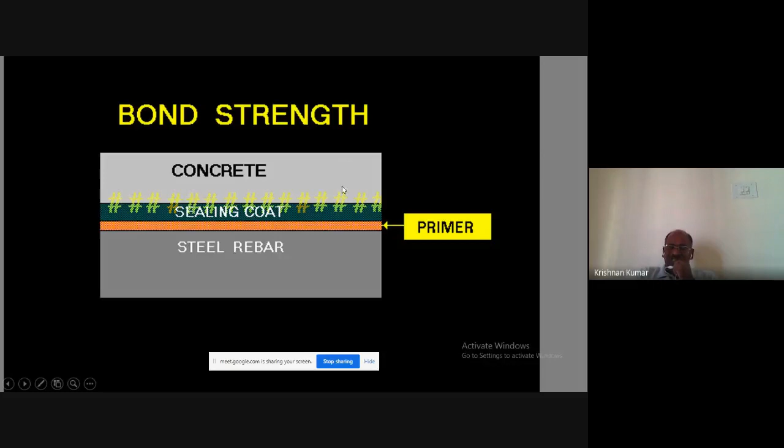After that, the same polymer is also available, then the sealing coating has reactive cement particles. While the concrete is getting hydrated, this also gets hydrated along with it, so a monolithic surface forms. The whole structure becomes monolithic, giving good results.

Now, the corrosion mitigation mechanism. The earlier one was the bond mechanism; this is the corrosion prevention mechanism.

For example, due to concrete pouring or other reasons, if a small micro-level hole happens, what occurs is that Cl minus and SO4 ions go in and attack the surface.

But here it's different because the primer is hydrophobic in nature. So whenever there's a micro hole, its effect is reduced by the hydrophobic property. When Cl minus tries to come in, it is repulsed, so negative ions are avoided and corrosion does not take place.

When this coating system was used during the late 90s - 97, 98 and onward - the Mumbai flyovers were given this, and Gujarat also received the CPCC coating system. When the earthquake happened, the CPCC coated bridges were not affected by any cracking.

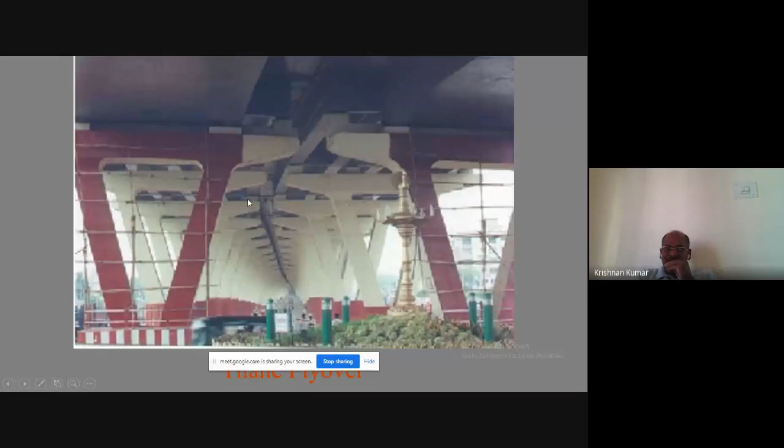We used the CPCC system for the flyovers. This is one of the Thane flyovers, these are another near Chembur, and this is near Airoli. So many bridges have been constructed like this. Still, I can talk more.